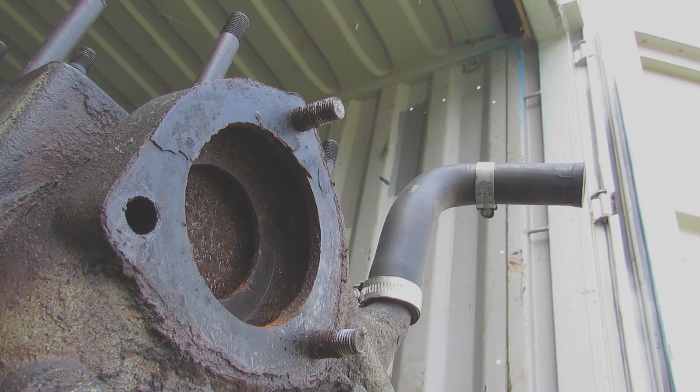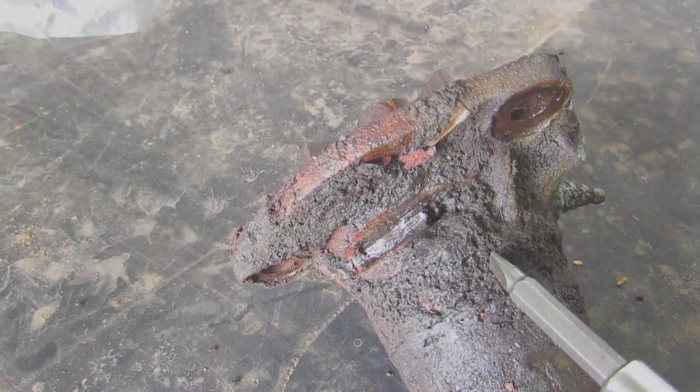Alright, so here you can see the old water pump. It's covered in gunk and crap. Look at that. That is just disgusting. Look at that, it's just chipping off. So we're getting rid of this and have a new one. Look at that. It's quite heavy to be honest. So there's a new one.

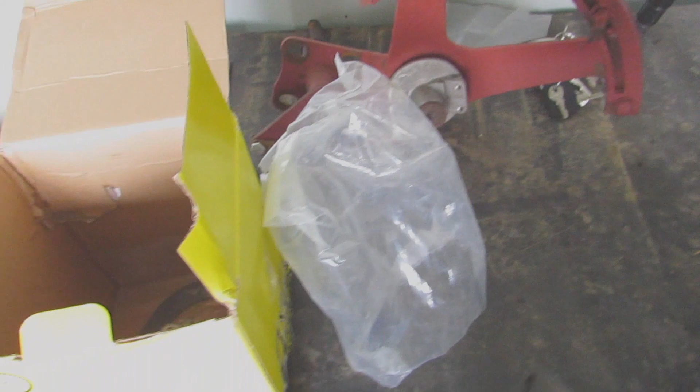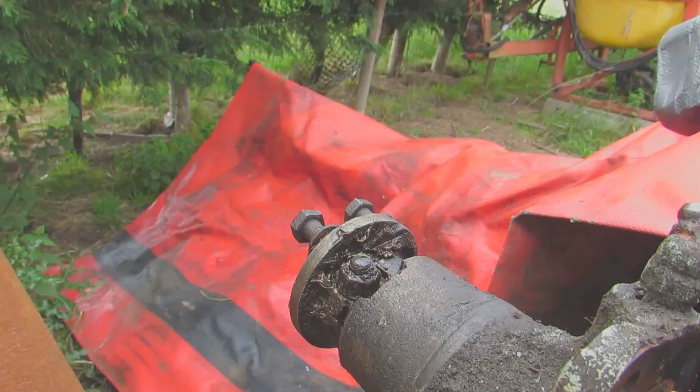So we'll be fitting that just now, but I've just dry fitted it and one of the lips overhangs a little bit, so it might take a little bit of fitting to make sure it's properly watertight. But yeah, let's get on with it. We do have to transfer this pulley to here though, so I'll do that now. Okay, so I want this bit off because this is where the fan belt pulley and the fan mount to. So I need this off because I need to fit it to my new one. So I'll just take that off.

There's a little inlet opening here. You've got to line up that with there, the bolt and the nut with there, so you can get a socket in or a spanner, and it's a half, for anyone wondering what the size is. So I'll just take this off. I have it in a vise, but this is the old one, so it doesn't really matter too much.

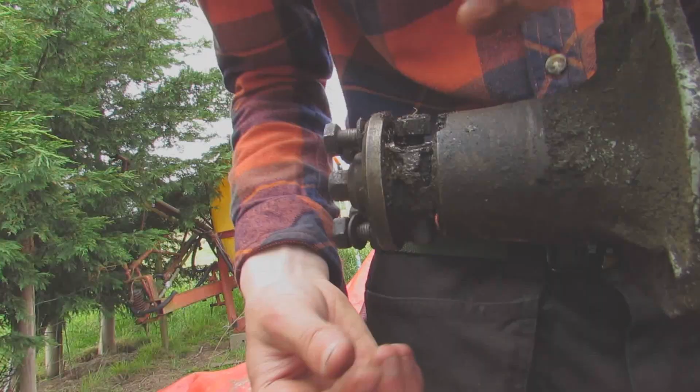Oh, the grease. There's a lot of grease in here. Just what you want for messing all your tools up. I did scoop a bit of the grease out before we started. Everyone likes greasy nuts. There we go.

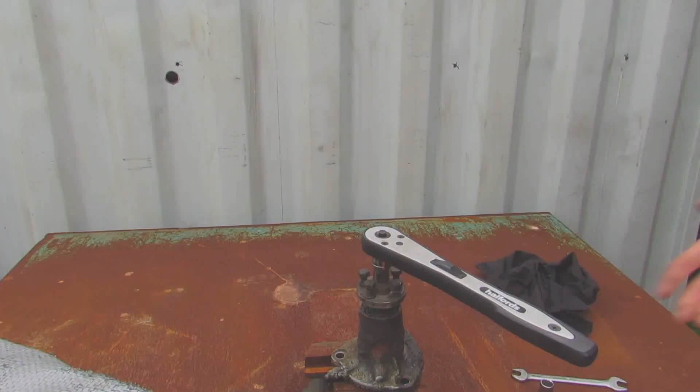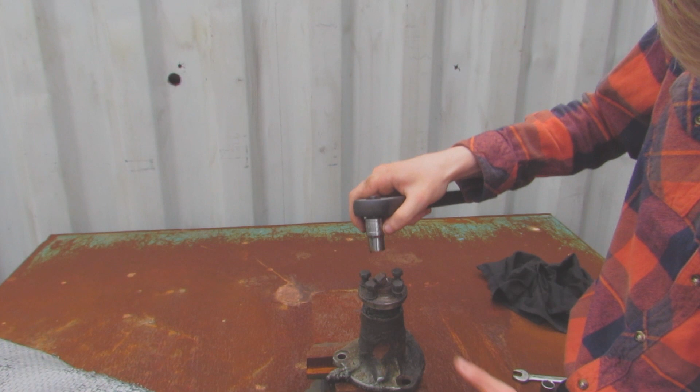Don't know how this actually comes off. Assuming it should just come off. Okay, so I'll take this end bolt off. No, I think it's actually a nyloc one. I've got a new one, so this one doesn't matter too much. There we go. And oh, that's hot. How do we get them? That's part of the casting. That one's going to need knocking out. I'll be back.

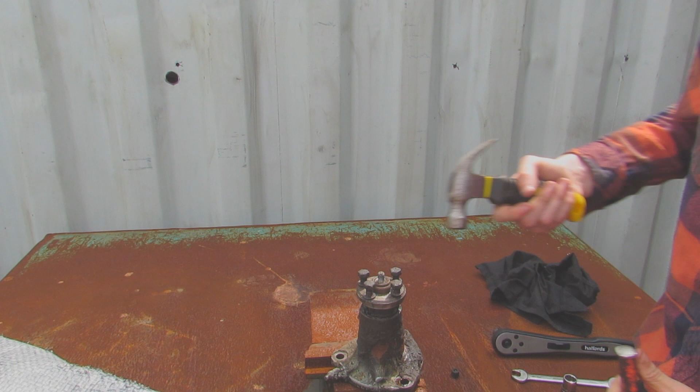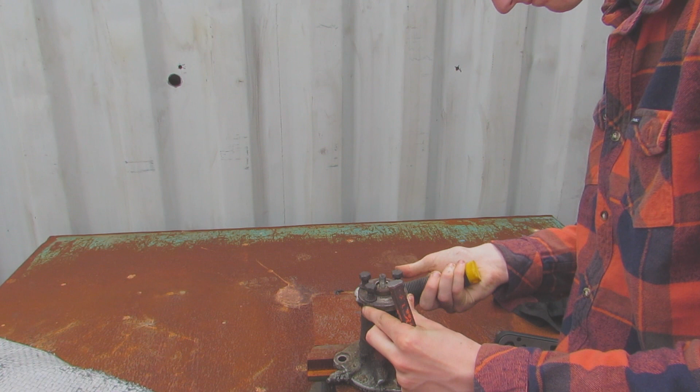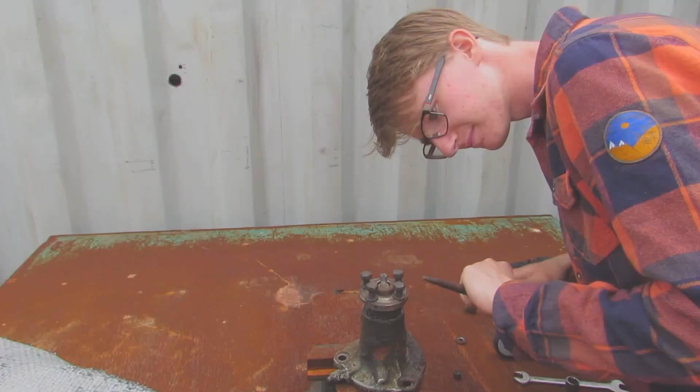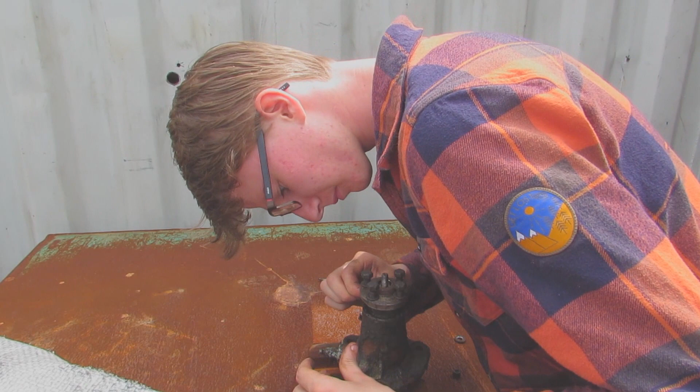So this washer's stuck, so I'll just use a little punch, just a little bit, and a hammer to tap it out. There you go, that had it. And it comes right off. Wow, the grease. Just get a bit more grease out. There we go, the washer's off. That should come out, or at least I think it should. I'm going to go have a look in the manual.

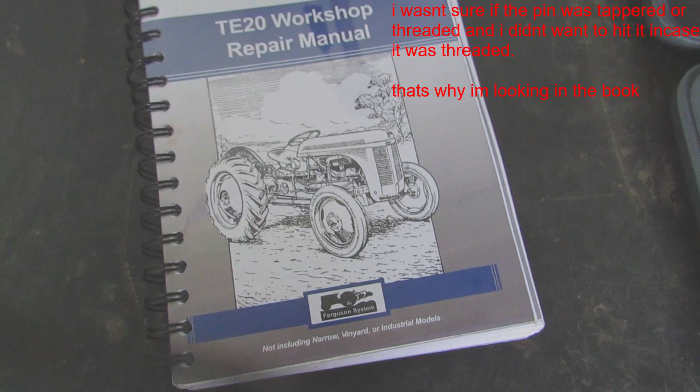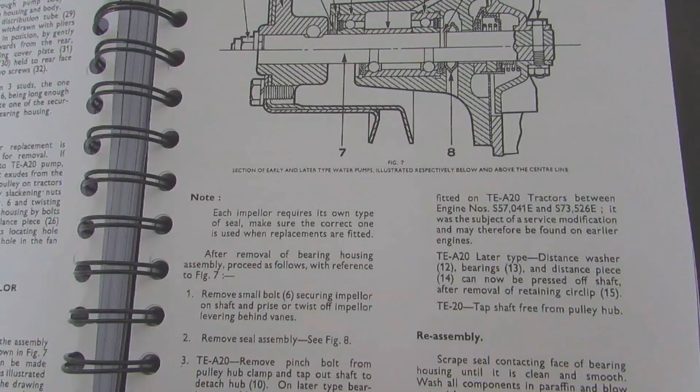Alright, so we'll have a little look inside the manual. Sorry if you can hear angle grinding. It's a fan. Right, section D is cooling system. Find section D. The cooling system. Water pump is in the 20s. This is the water pump.

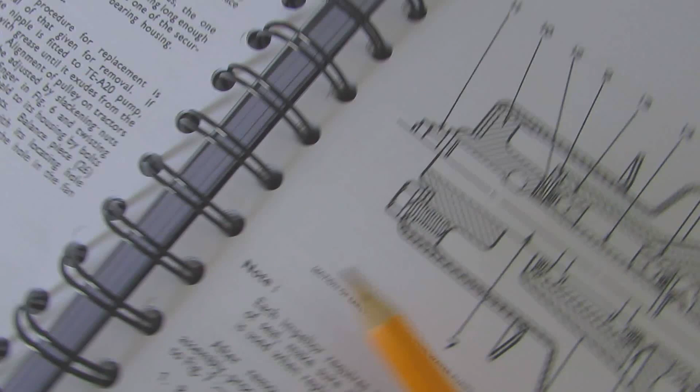So this is the cross-sectional diagram of the water pump, and this is the pin I'm trying to get out. It'll probably look more familiar this way. This is the fan pulley. This is where the fan mounts, this is where the belt goes, and this is the pin I'm trying to get out. But it doesn't really say much. I'll keep messing and I'll come back to you.

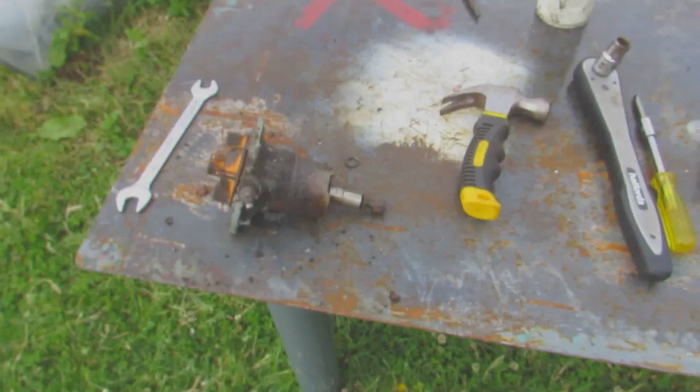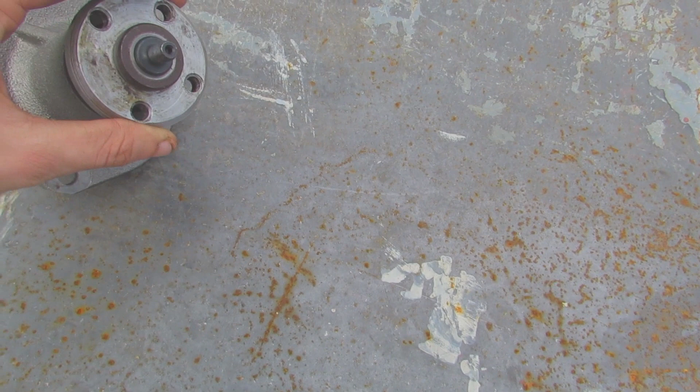So we've managed to get this off. It was a tapered pin in here, through there, but I'm just taking that in the barn because I'm waiting for my granddad to come up with some taps and dies so I can clean up the threads for it. This is the new one. As you can see, that'll slot on there like that, as it should. I've cleaned that up. This is now scrap, don't want that anymore.

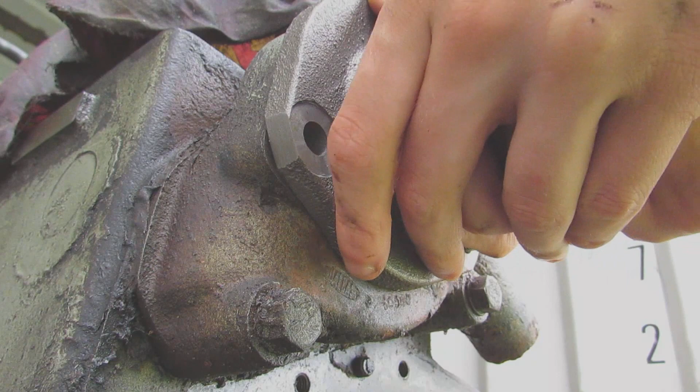That's better. Cool looking train just went by.

So I've just cleaned this face off because it needs to be a spotless face for this to mount up nice and watertight. There is a gasket, and I've also got some paste I'm going to put on just to make sure, because I want everything on this tractor to be done properly. Okay, so now I've cleaned up this face, it's nice and smooth.

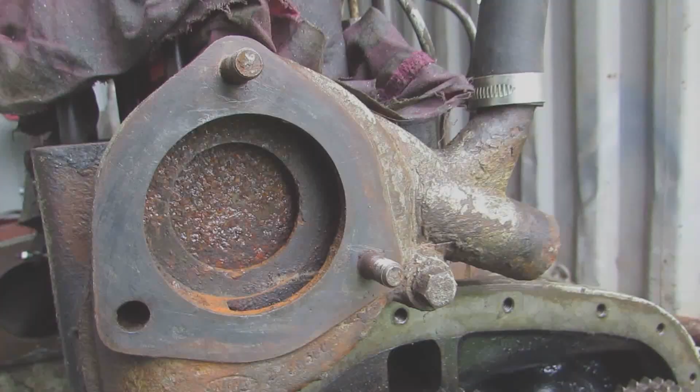Because it's an aftermarket part, it might not be true fitting. It is for this tractor, but because it's not made by the Ferguson factory, I'm just going to put a little bit of this Hermetite non-setting gasket jointing, just a smear, so I can make sure we get a good seal, because I do not want to be taking all this off again.

So that paste I was going to try and use, it's quite an old tin and it's gone off, so I'm not going to bother. We've got this paper gasket and that should suffice. Let's get this pump on. Because it has enclosed bearings, this pump has a drain hole, so the drain hole wants to be at the bottom. There we go. Just make sure it's not picking up. Jeez, I want to slide these in.

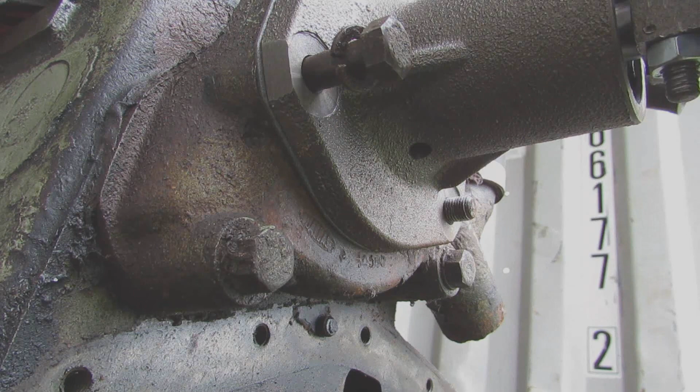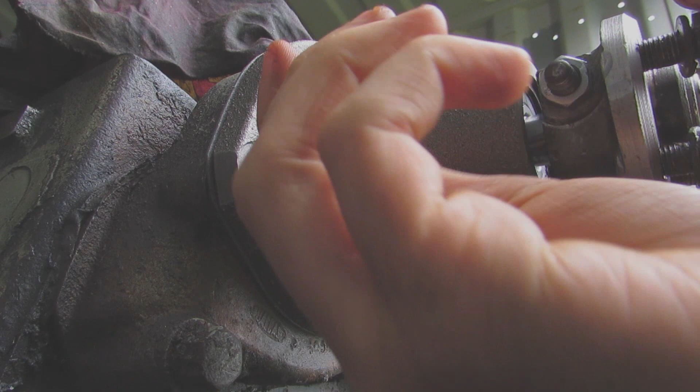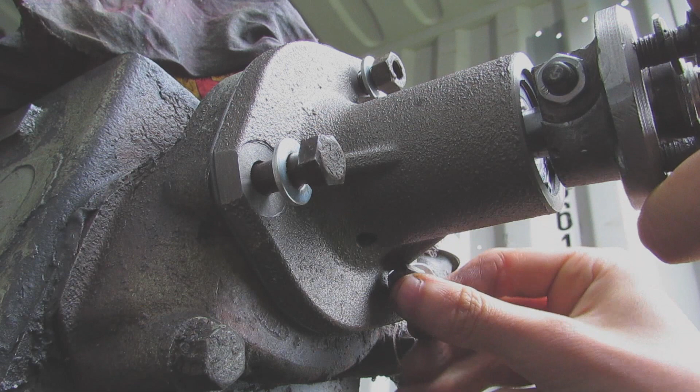Okay, so I've got some new washers. I like replacing hardware, because then you know it's going to be right. They're not crush washers, but it should be alright. Just don't start crying at me in the comments saying that should have a crush washer on it. I don't have crush washers, so this is what it's getting. Cool.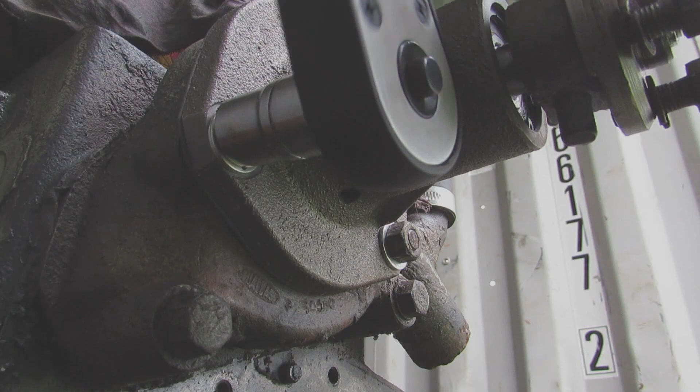So I've just given this bolt a wire brush and a wipe down. It's almost as if there's gunk in that hole. And there we go. The water pump is fitted. So good to go now, boys. Next step is the cylinder head. We are collecting it tomorrow, and then I can completely refurb the cylinder head, and I'll make that a video for you guys.